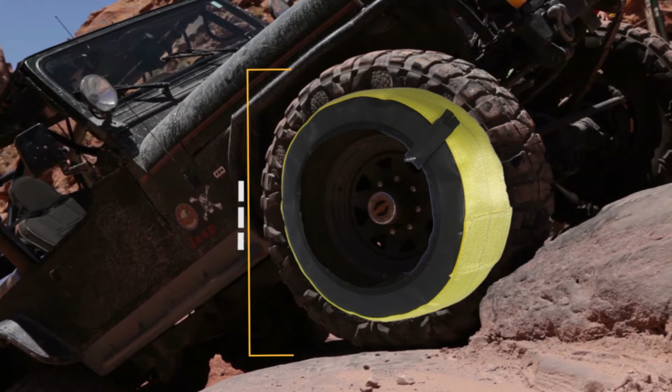Conceptually, Coyote Boltless Beadlocks are a tire within a tire. This tire within a tire locks and pinches both the inside and outside tire beads to any ordinary rim. In addition, and just as important, it also provides a 3-inch high, 50 PSI tire and rim protecting bump stop, even at a meager 3 PSI or less.

There are many other advantages too. First, the system allows you to use your existing rims, saving you money. You don't have to buy new rims. There are no DOT issues. They are street legal. They lock both the inside and outside tire beads securely to the rim, as already mentioned. They can be used with your next set of tires or rims.

And the tire and rim protecting bump stop needs mentioning again too. They are lighter than conventional beadlock rims. There are no balance issues. They can be easily balanced just like any standard wheel. Due to the beadlock occupying part of the tire air chamber, they take less time to air up and down.

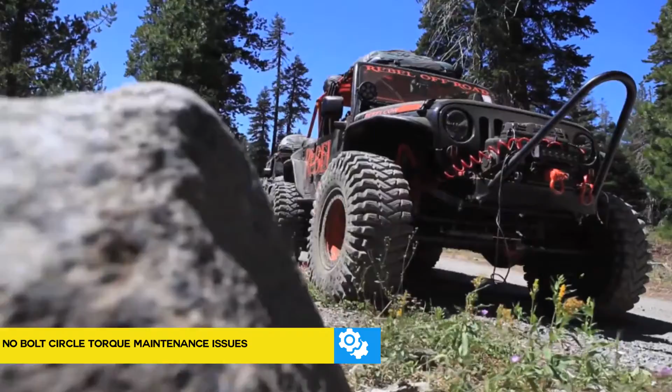They have no bolt circle torque maintenance issues. Just check the tube pressure once in a while. They provide a limp flat capability so you can move to a safer spot to change your spare when you have tire problems. The Coyote Boltless Beadlocks sport a 5-year warranty. They are proudly made and supported in the USA.

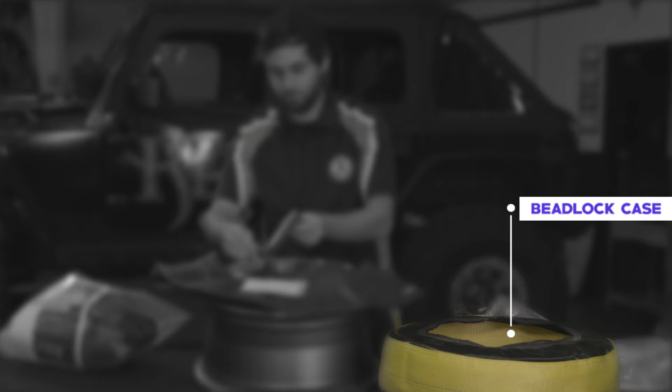Before we show you how to install a Coyote Boltless Beadlock, let's identify all the components we'll use in this installation process. These components include the beadlock case, inner tube, powder bag, and air channel, plus your existing tire and rim.

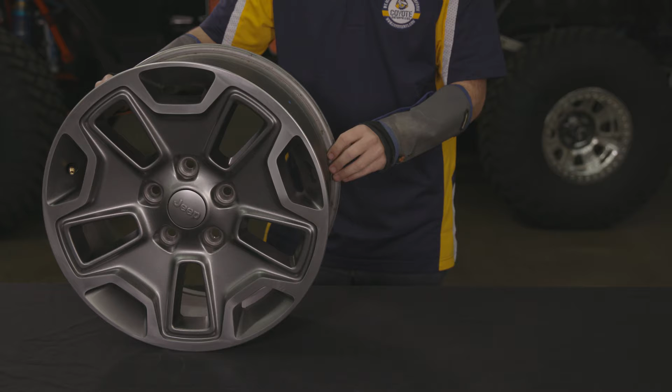Any ordinary tire will work with Coyote Boltless Beadlocks. You may use standard or new rims. Any stock or aftermarket rim will work with a Coyote Boltless Beadlock system. The Coyote Boltless Beadlock system works with an alloy rim, as we will do in this installation, or steel rims.

A Coyote Beadlock package contains all you need to make one installation per rim. The most important beadlock component is the beadlock case. It is the key to containing the inner tube and pinching the tire beads between the beadlock case beads and the rim's bead seating surface.

The beadlock case is the most improved and critical part of the Coyote Boltess Beadlock system. It is now made with stronger materials and improved construction methods, all resulting in a stronger, more durable product. It consists of 4 parts. Since it's a mini tire, we give the various parts tire names.

First, there are 2 black PVC sidewalls. These are made of PVC twice as strong as the original beadlocks imported from Australia. Second, there are 2 beads. They use new sewing techniques, ensuring a stronger product.

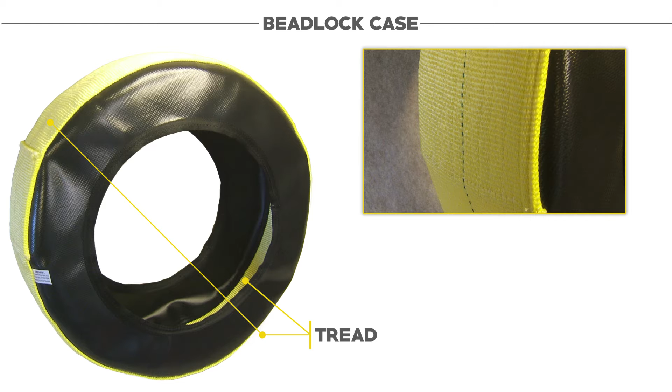Third, there is the tread. It is now made from material 9 times stronger than the ones imported from Australia. The tread overlap uses new, stronger joining methods too. In the edge view, you can see just how much thicker the new, stronger tread webbing is.

And fourth, there is the tread overlap. The importance of its added weight will come into play at installation. It will be used to counterbalance the weight of the 2 valve stems.

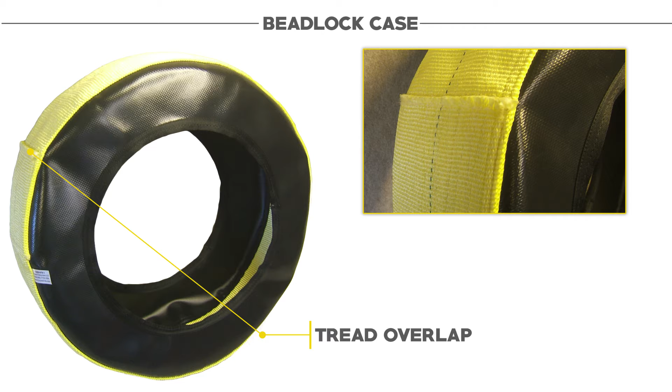More on that later. Each bag also contains an inner tube. The inner tube holds air within the beadlock case. This forces the beadlock case beads against the inside of the tire beads, pinching them securely against the rim's bead seating surface. Note that the inner tube has an all-thread valve stem.

Since you basically have a tubeless wheel, you must seal both valve stems and their related holes. For the tube, first check for the small O-ring at the base of the tube valve stem. It seals the valve stem on the inside of the rim. The larger O-ring goes on the outside of the rim and supplements the inner seal.

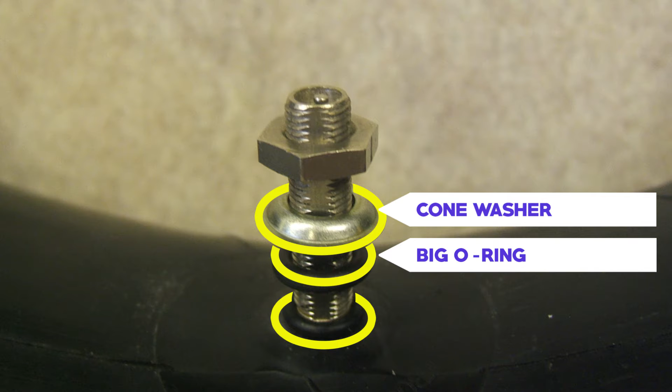The cone washer goes next, cone side up, on the outside of the rim. It grasps, covers, and protects the large O-ring. It allows the nut to be tightened without damaging the O-ring. The nut screws down onto the cone washer to tightly clamp and securely seal both the inside and outside O-rings.

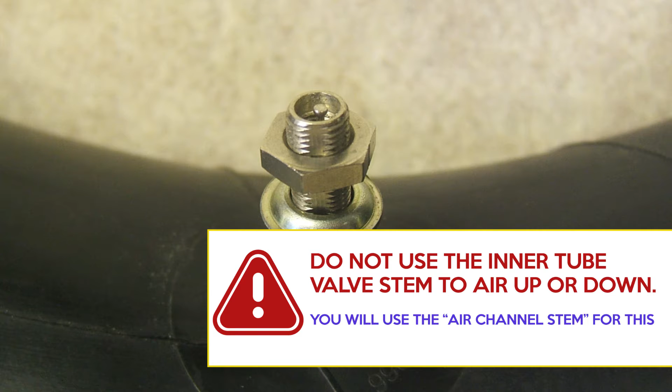The valve stem cap keeps the valve core clean, ensuring a clean air path for checking the pressure. This is how you'll tell the difference between the tire and the inner tube valve stems. Remember that. It's important because you never want to air down and up with that valve stem. You only want to use the air channel valve stem, not the inner tube valve stem.

To make sure all the beadlock parts move smoothly into place as you finalize the installation, you will find a bag of powder. This acts as a lubricant between all the parts. Also found in the beadlock bag is the air channel.

This patented air channel gets the air in and out of the tire's air chamber. Think of it like a snorkel between the outside world and the air chamber within. The metal valve stem is your outside world connection with the air channel.

The air moves through a channel created within the black PVC channel by a flexible, non-collapsible plastic spacer within. It prevents the inner tube from clamping shut all parts of the air channel. The air channel's open end sits within the tire's chamber, allowing the tire to freely breathe.

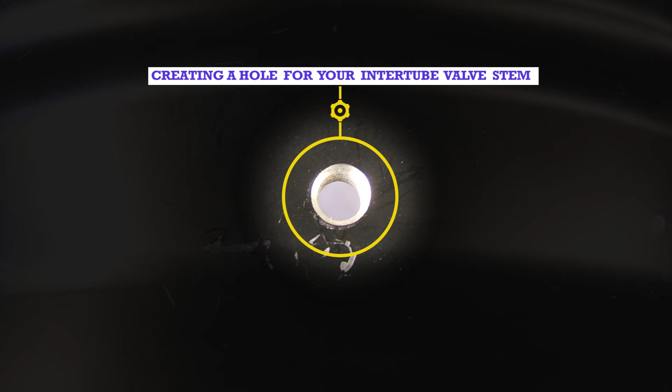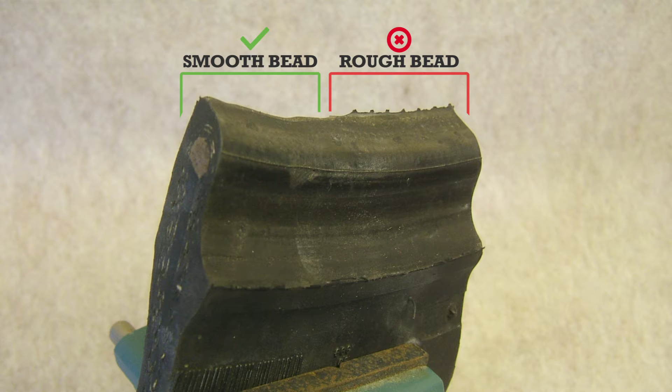Rim and tire modification tools: the center punch, small ball peen hammer, air grinder or electric drill, 1/8-inch pilot and 5/16-inch drill bits, along with the 45-degree chamfer tool, have to do with making the hole in your rim for the inner tube valve stem. The 2-inch number 40 grit sanding drum used on either the drill motor or air grinder smooths the tire bead sharp edges to prevent them from damaging the inner tubes.

The tire bead sharp edges need smoothing to prevent inner tube damage. The files are used to smooth a used rim's outer edge.

Beadlock specific install tools: we'll tell you why we prefer a Windex-like product over conventional tire lube later on. The 3x4x5-inch wooden blocks are used to create a workspace between the rim and the tire.

Arm guards or a long-sleeved shirt protect your arms when working through this workspace. The 11 and 12 millimeter wrenches are used to tighten the inner tube and air channel valve stem nuts. If you install Coyote beadlocks professionally, you will eventually want to make a specialized air channel lifting tool similar to what's shown.

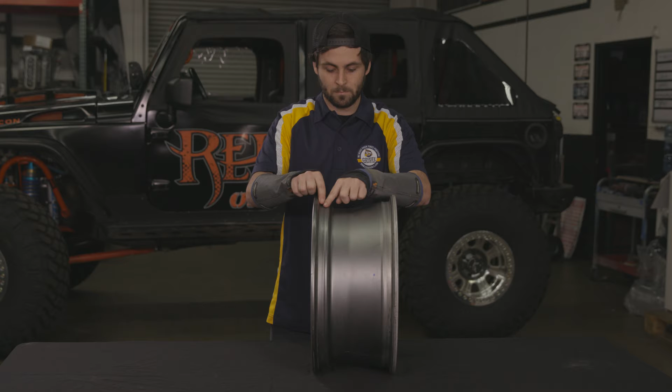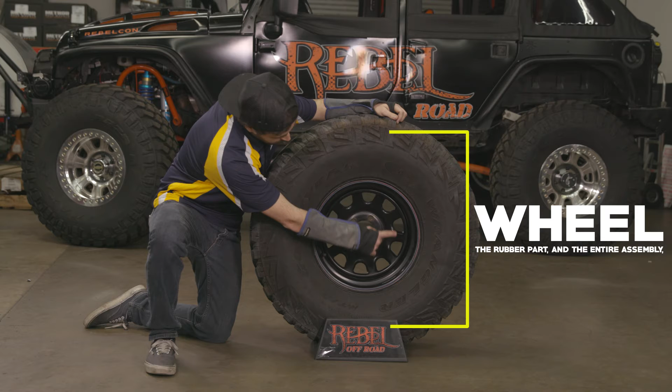To help you understand important terminology used in this video, let's review the anatomy of a basic rim and tire. Throughout this video, we will use the term rim to mean the metal part that receives the tire. The rubber part and the entire assembly we will call the wheel.

Let's look at a basic rim first. Here is the front of a rim—it is the lug nut side. Here is the back side that faces the vehicle and brake area. This is the drop center of the rim.

This smallest rim diameter area is what allows you to put a less than 15-inch ID tire bead onto a greater than 15-inch diameter rim.

Here are the rim's bead bumps. Here's both the inside and outside bead seating areas. Here's the rim's inside bead seating surface area. Here is the existing factory valve stem hole. The stock rubber valve stem is replaced by the patented air channel.

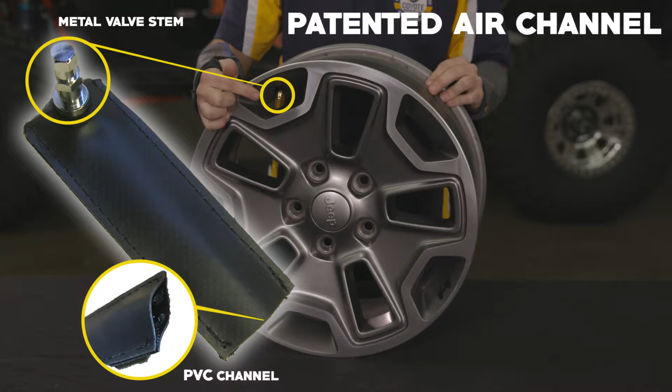Remove the stock valve stem. Most tire shops cut them out, as shown.

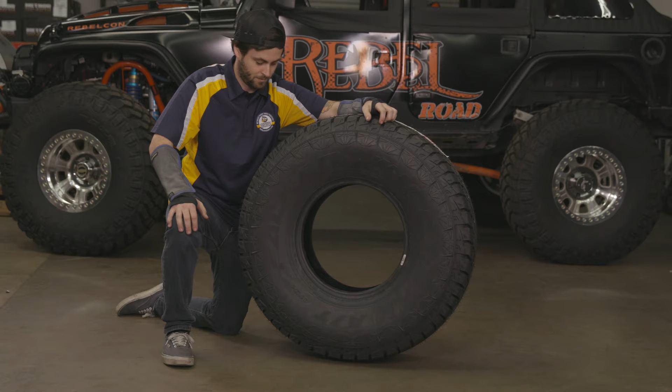Your tire has a few parts that also need identifying. This is the tire's tread, sidewalls, and beads.

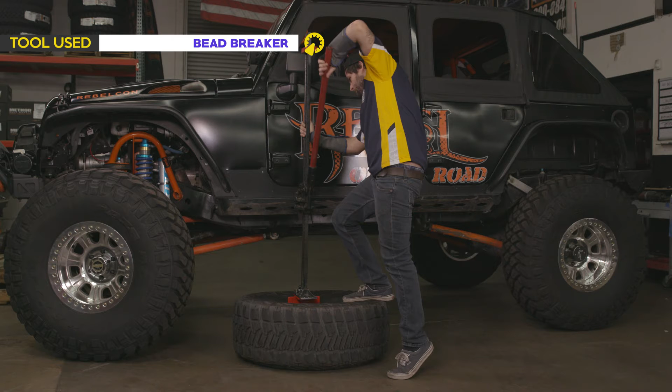Remove the valve core from the valve stem. Cut the valve stem from the rim—this will be replaced by the air channel. Break both tire beads from their seats on the rim, then remove the outside tire bead.

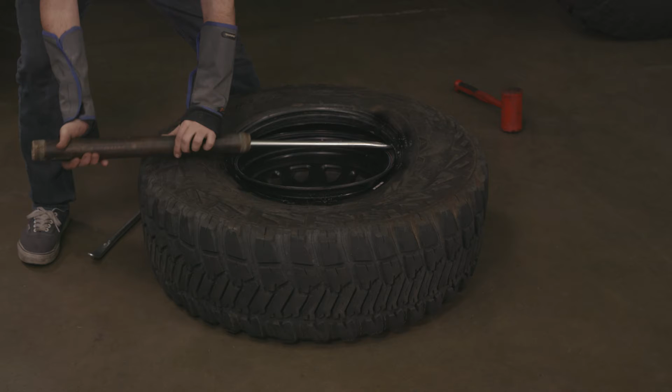Remove the inside tire bead.

If you are installing the Coyote beadlocks on used rims, you first need to properly prepare them. Preparation means cleaning the rim and removing 100% of all rough edges on its inner and outer edges. First, remove stickers and clean your used rims using soap and water or an industrial cleaner.

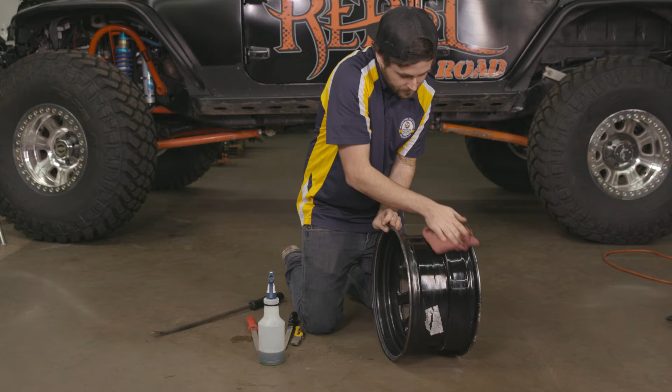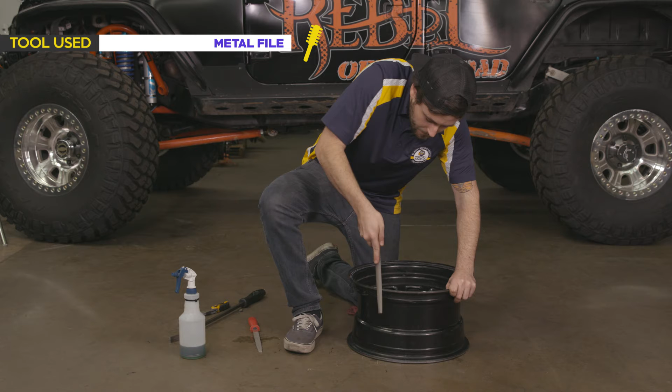Rough edges or burrs may cut into your inner tubes during installation. To remove any rough edges or rim burrs, smooth as necessary using a metal file. Finally, check your smoothing work for perfect smoothness.

With properly prepared new and used rims, determine the perfect inner tube valve stem hole location. This perfect location will most likely have to be adjusted to a more practical location later on.

First, lay the rim flat on a workbench with the outside of the rim facing up. The factory valve stem hole will also be facing up. Now, put the inner tube on top of the rim with the valve stem facing up. Position the inner tube's valve stem 6 to 8 inches clockwise from the rim's factory valve stem hole.

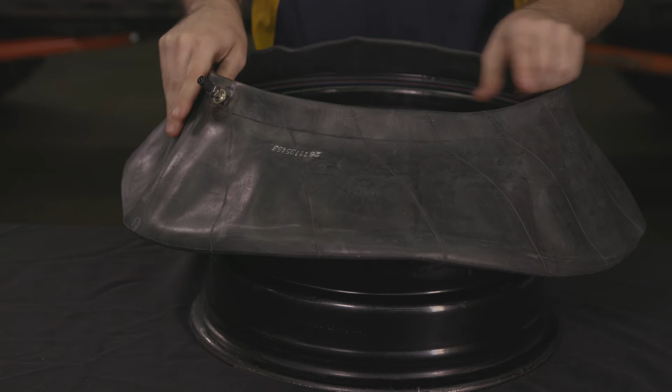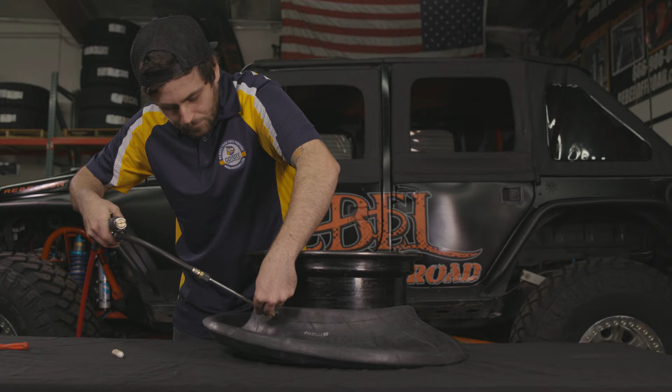Now, pull the tube completely over the rim. Inflate the inner tube enough for it to take shape. While inflating, the valve stem will distort against the rim as shown here. This will not harm the inner tube's valve stem.

Vertically center the inner tube on the rim as shown here. Mark the inner tube's valve stem location with an appropriate marker. This apparently perfect marked location needs to be carefully examined before drilling the hole for the inner tube's valve stem.

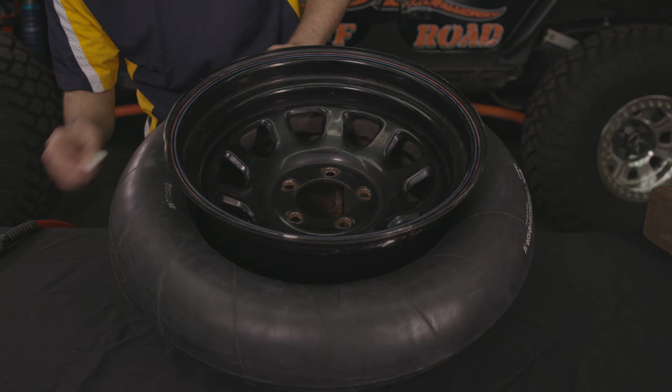Your marked location may not be practical, especially if you plan to have the inner tube's valve stem located inboard on the brake side of the rim. If the desired valve stem location is inboard, the location must be checked to ensure that it does not interfere with the brakes and associated components in and behind the rim.

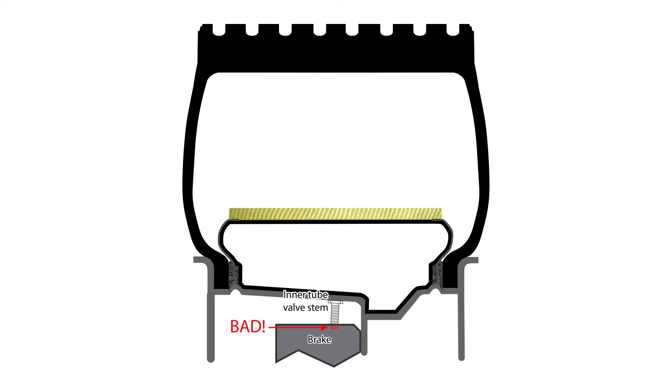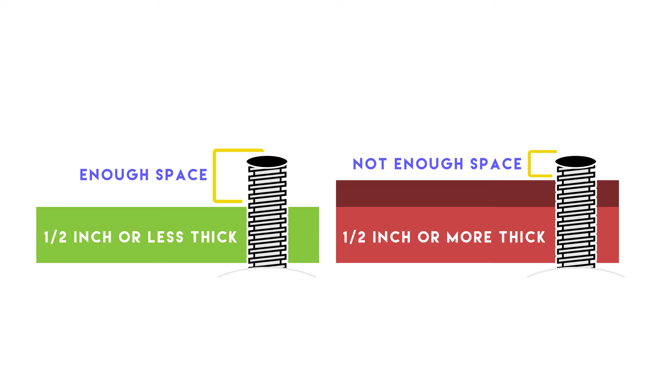Lastly, the rim must not be thicker than half an inch where you intend to drill the hole. If the rim is thicker, you will not be able to get a standard air chuck or most air gauges on the portion of valve stem that sticks out of the rim.

Adjust the perfect hole location to accommodate all of the above. This typically means moving the mark slightly toward the outside of the rim and clockwise or counterclockwise to end up between a pair of the rim spokes. A little more or a little less than 6 to 8 inches away from the factory hole is okay.

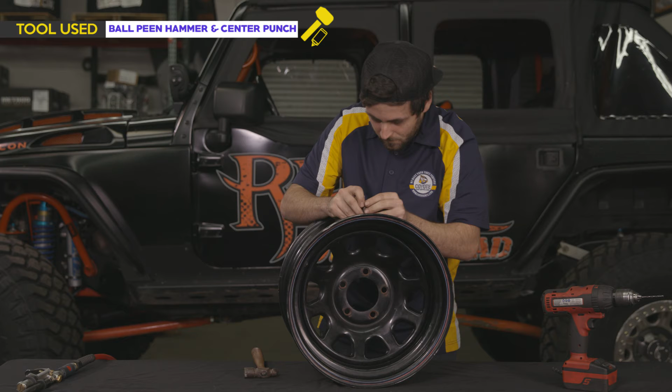If your relocated inner tube valve stem hole is now appropriate, center punch as shown. Now, drill a pilot hole using your 1/8 inch drill bit, taking care to drill this hole perpendicular to the rim's surface.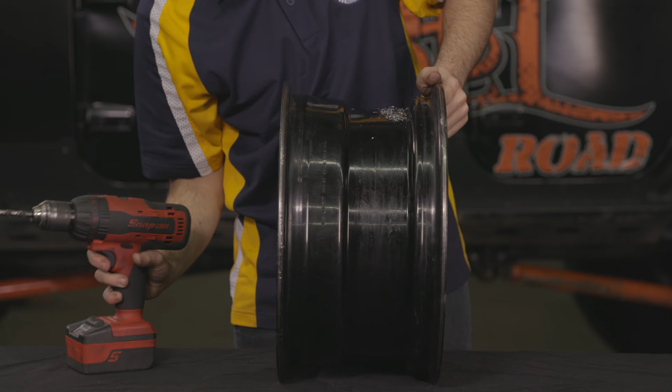Next, enlarge the hole to 5/16 inch, again paying attention to the perpendicularity. Carefully chamfer both sides of the hole as shown.

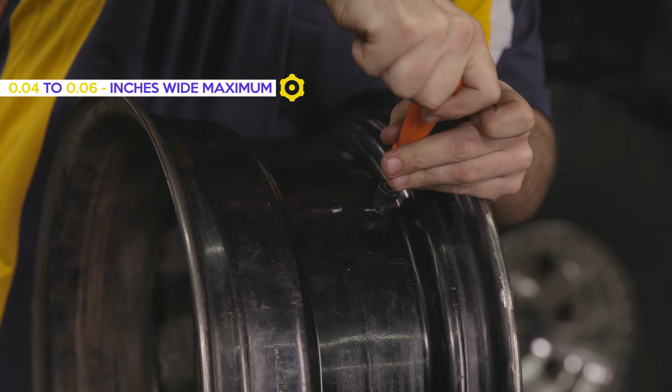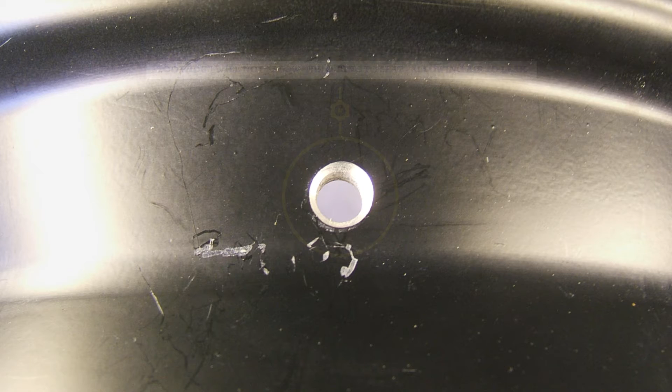The chamfer face should be 0.04 to 0.06 inches wide maximum. If using the chamfer tool with an electric drill, be cautious not to make the chamfer face too wide. Too wide means that the O-ring at the base of the inner tube valve stem will not seat, allowing air to leak. The Beadlock warranty does not cover improperly drilled or chamfered inner tube valve stem holes. Drill and chamfer very carefully.

After completing all drilling and chamfering, clean all metal chips off the rim and other components. Chips left behind may cause inner tube failure.

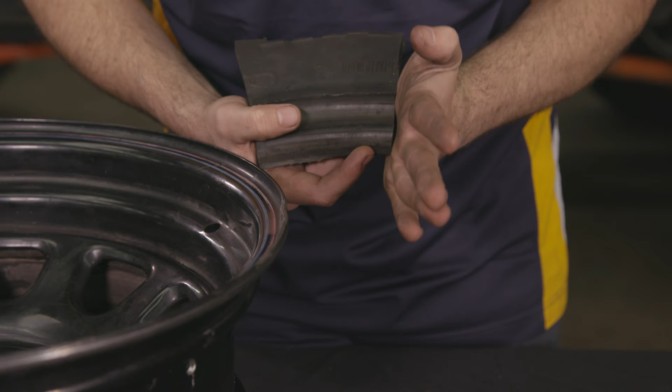The inside edges of your tire's beads are very sharp. In addition, the large tire beads are usually too wide to fit fully behind the rim's bead bumps. This means they hang out over the bead bumps, capable of cutting the inner tubes. Sharp tire beads cut Coyote inner tubes.

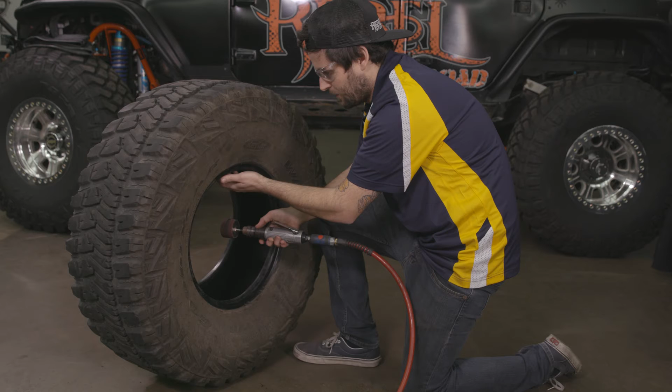To eliminate this problem, you must slightly round the sharp edges of your tire beads. Coyote Enterprises recommends using a number 40 grit 2-inch sanding drum on an electric drill or air grinder.

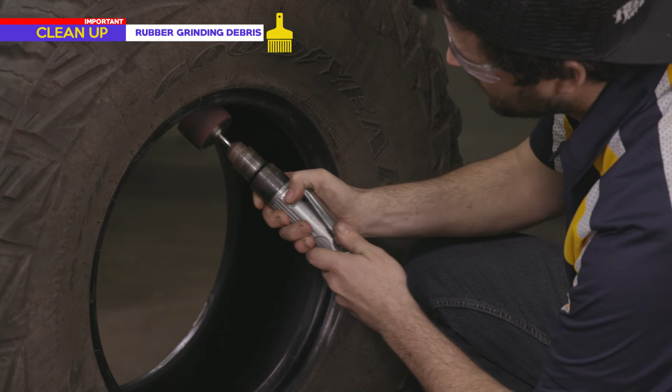Clean and remove all rubber grinding debris from within the tires and surrounding beadlock parts. With that done, coupled with the new Coyote heavy-duty inner tubes, failed tubes are a thing of the past.

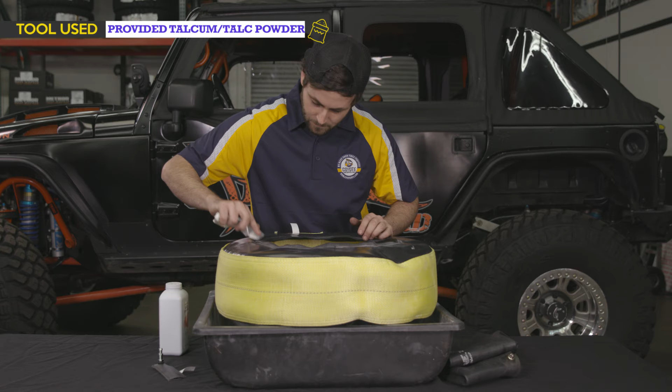Using the powder provided, powder all beadlock parts. This allows the inner tube and other beadlock parts to easily move and properly align during the installation process. Use lots of powder on each beadlock component.

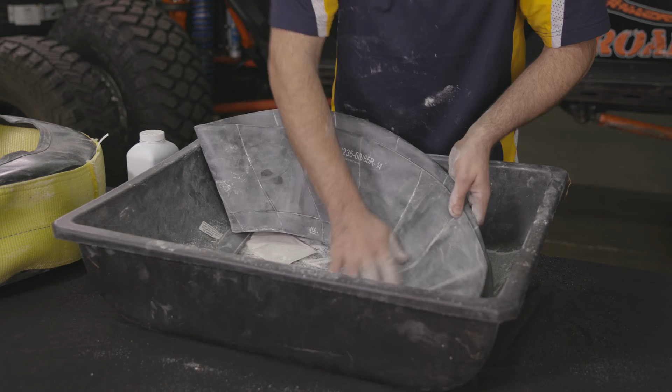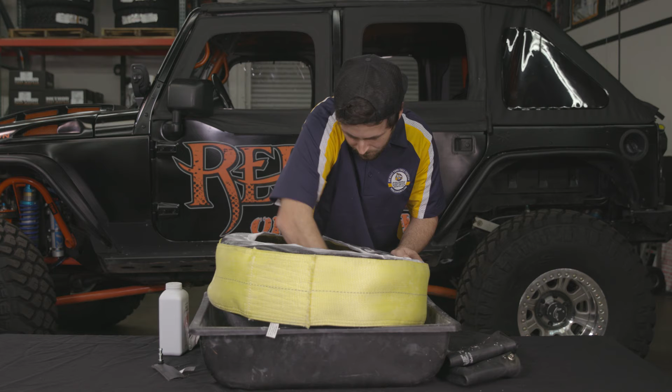If additional powder is ever needed, you may use any bath, baby, or talcum powder, hydrated magnesium silicate that does not contain cornstarch. We show using a small mortar boat to contain excess powder, but the inside of the tire works equally well. Proper powdering of all the beadlock components means shaking lots of powder on each component, then spreading it evenly across all surfaces with your hands.

Powder the inside of the beadlock case. Pay particular attention to powdering the inside and outside areas of the beadlock case beads. Next, powder the entire outside of the inner tube. This is best done with the tube lying completely flat, uninflated, and flipping it.

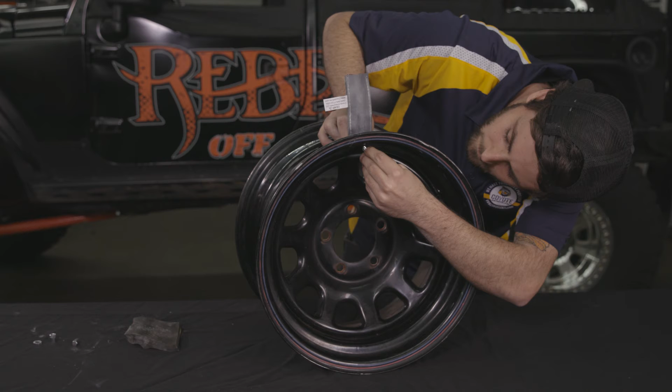The Coyote air channel has a metal valve stem at one end. Check that the rubber grommet of the air channel fits perfectly in your rim's factory valve stem hole. Temporarily and without force, hold an air channel up to and put it into the factory valve stem hole.

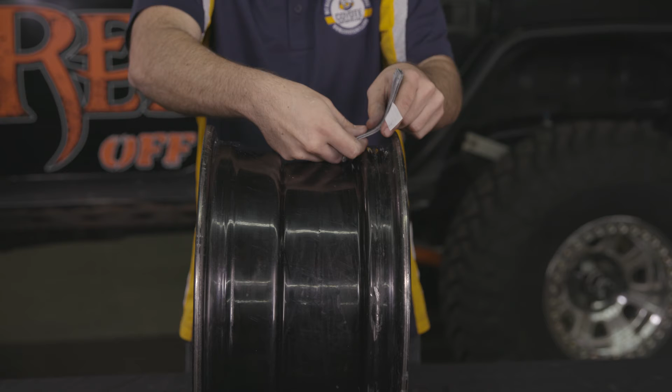Custom contour the air channel to the shape of the rim as shown. Check to see that the open air end of the air channel will reach past the anticipated location of the tire bead and beadlock case bead and up and into the tire's air chamber.

Using a Windex-like product to help mount the inside tire bead in place of conventional tire mounting lubricants. Use of this product ensures that if re-wetted in actual use, the rim will not spin within the tire. Conventional tire lubricants are soap-based. Mount the inside of the tire bead using the drop center of the rim as normal.

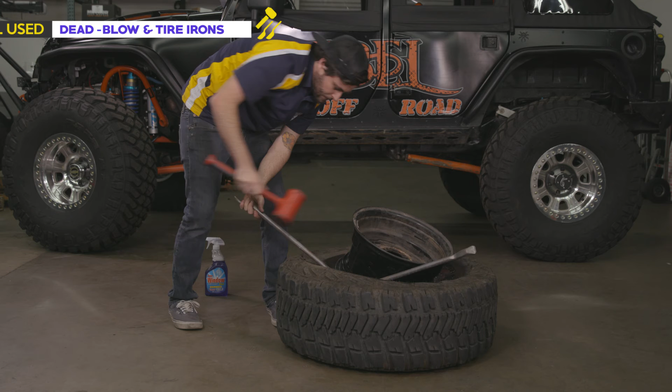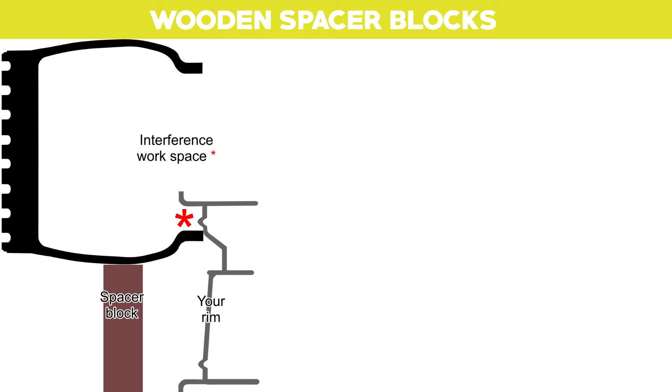Once the inside tire bead is on the rim, elevate the tire with the wooden blocks. We'll use this well-used veteran to show how to use the spacer blocks. In this position, you'll get the tallest tire lift. Moved to this position, you get medium height. And in this position, you get the least lift. Position the blocks to achieve the height needed for the best work gap and access to the valve stem holes.

By elevating the tire from underneath, a workspace is provided so you can work between the outside edge of the rim and the unmounted outside of the tire bead.

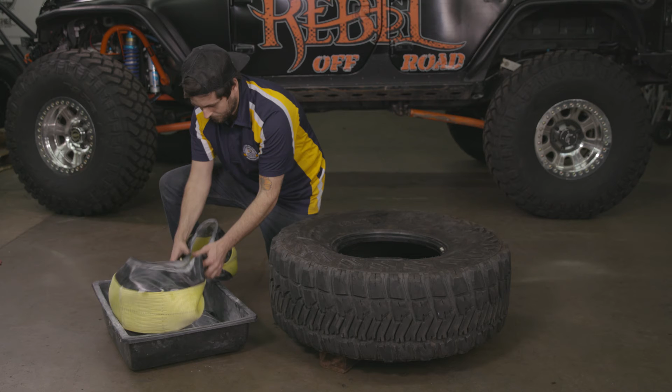Now, working through this workspace, mount the inside beadlock case bead, taking advantage of the rim's drop center, just as with the tire bead. But first, rotate the case until the tread overlap is opposite the two valve stem holes. Having the heavier tread overlap area directly opposite the valve stems will help compensate for the weight of the two valve stems.

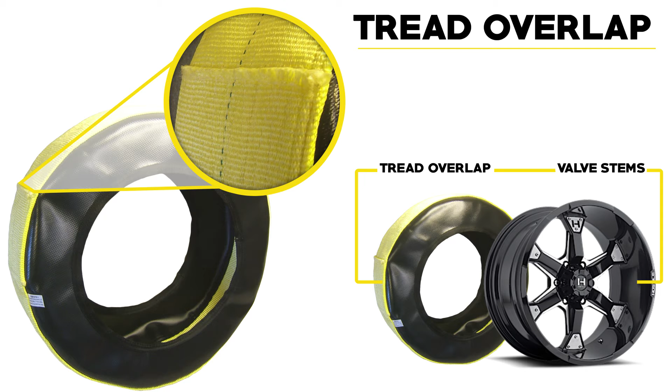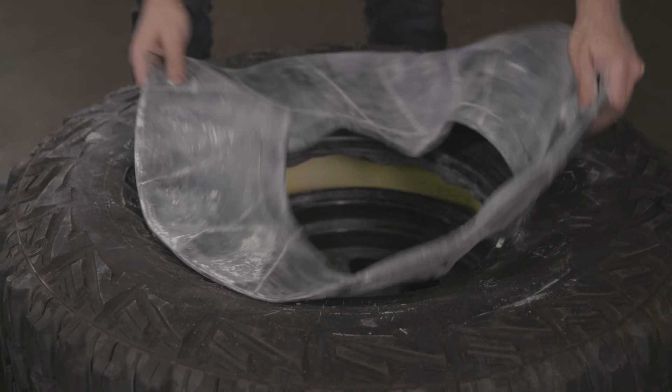Before stuffing the inner tube into the beadlock case, check to make sure that the smaller inner O-ring is at the base of the tube valve stem. Next, lay the inner tube flat on the tire as shown, making sure that the inner tube's valve stem is pointing up.

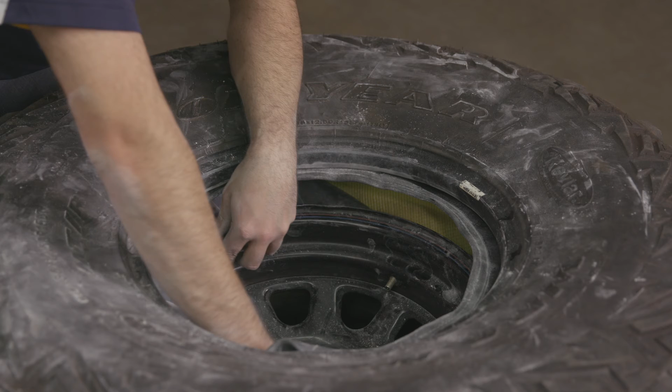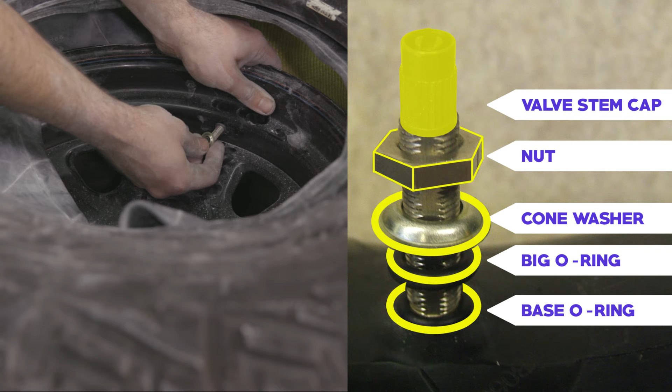Before stuffing the inner tube completely into the beadlock case, push the inner tube's valve stem through your newly drilled hole in the rim. This may require changing the height of the blocks for free access to the rim's new valve stem hole. Once through the rim, install the larger O-ring on the inner tube valve stem and the cone washer cone up. Lastly, thread the nut halfway down the valve stem.

Now, stuff the remainder of the inner tube inside the beadlock case. This may require slightly stretching the tube over the rim. Once mounted on the rim, check and feel by hand that the inner tube is laying flat and smooth. Make sure that the inner tube has no folds, wrinkles, or twists. The inner tube's valve stem should also be relaxed and unstrained.

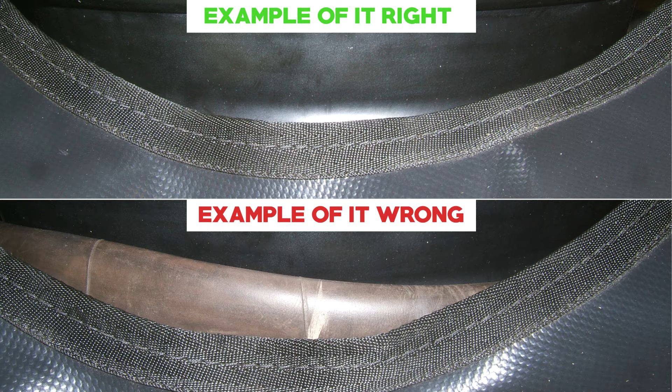As shown, mount the outside beadlock case bead over the rim. To achieve this, it will again be necessary to position the beadlock case bead in the drop center just as you did with the first tire bead. But in this case, you must now make sure that the bead is on the rim's drop center and not on the tube. If you are on the tube, you may pinch and cut it when forcing this bead over the outside edge of the rim. With the bead on the drop center, there is no chance of damaging the tube.

You and your beadlock inner tube will be happy campers if you place the beadlock outer bead in the drop center and not on the tube either time. Do the same when placing the tire's outer bead over the rim. Remember that when we get to forcing the tire's outside bead over the outside rim.

To install the Coyote air channel, either remove or reposition the spacing blocks as necessary for access to the factory valve stem hole. The tire must rest on the rim at a new height, whichever allows the easiest access to the rim's factory valve stem hole. Tilt the tire over the factory hole to where you can freely access it without stressing the inner tube valve stem. As shown, insert the pre-contoured air channel's valve stem into the factory rim hole.

Ensure that the air channel's grommet seats properly into the rim's hole. This means that you can see a thin portion of the grommet fitting unwrinkled and completely into and through the factory rim hole. Wrinkles and bunches lead to tire air leaks. The open air end of the air channel should lie flat. Plus, it must point up and into the main air chamber of the tire as shown.

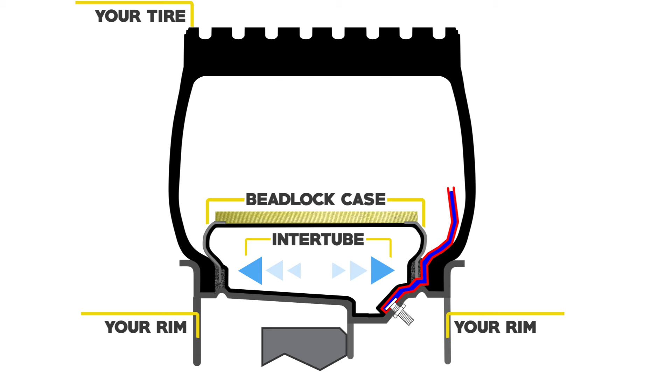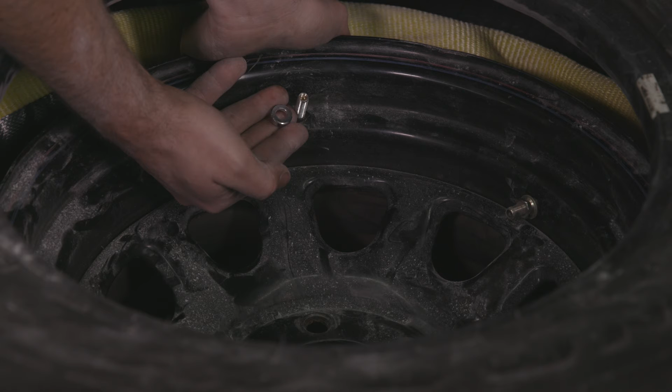Assuring again that the thin part of the valve stem grommet is properly seated into the factory valve stem hole, apply the washer, larger hole side down, toward rim and nut onto the air channel's valve stem as shown. Gently tighten the nut.

As the beadlock inflates, an improperly placed beadlock bead—that is, when the bead is not placed below and on the rim—will try to lift up and onto the air channel. This usually results in damaging the air channel. To avoid this, follow the next step.

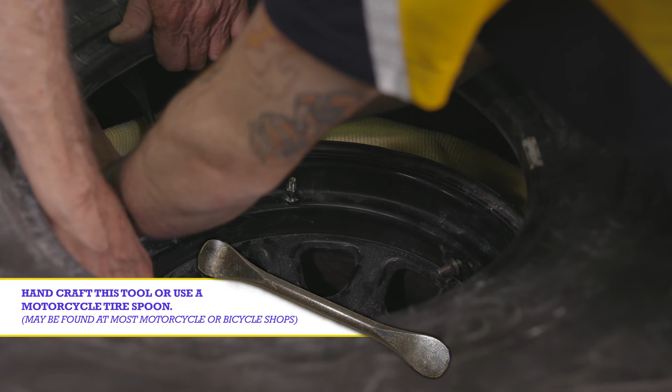With the fully mounted beadlock, force your fingers down and under the outside beadlock bead. Once under that bead, lift it up and onto the metal valve stem end of the air channel. This may be a little bit tight. Consider making a specialized tool to ease grabbing and lifting the bead up and over the air channel. If you professionally install Coyote beadlocks, for sure you will want to fabricate a tool similar to this one.

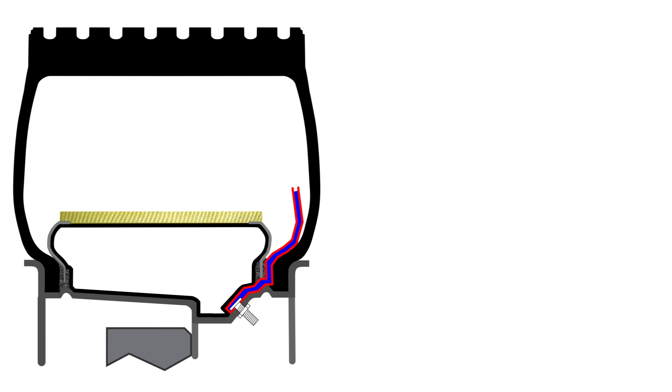The end of the air channel closest to the metal valve stem will now be between the beadlock case bead and the tire bead. The open air end of the air channel will be snorkeled up and into the tire's air chamber.

Begin to mount the outside tire bead as shown. Place the outside tire bead in the drop center of the rim opposite both valve stems. Make sure that the bead is not on or pinching the inner tube, as we showed when installing the beadlock's outer bead. This is not covered by the warranty.

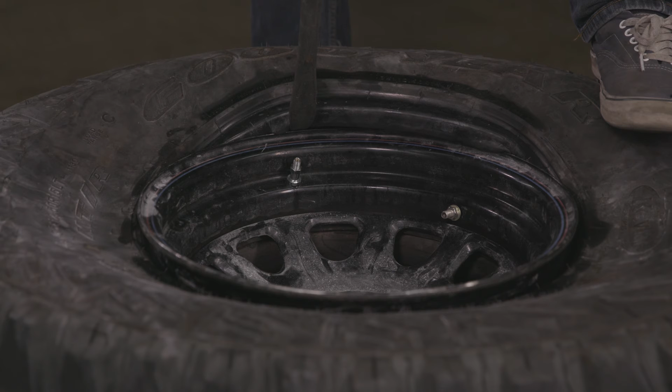Mount the tire bead by beginning at the inner tube valve stem. Using the tire irons and avoiding pinching the tube, continue the long way around clockwise to the air channel valve stem. Stop when the outside tire bead is about to drop over the rim just above the two valve stems.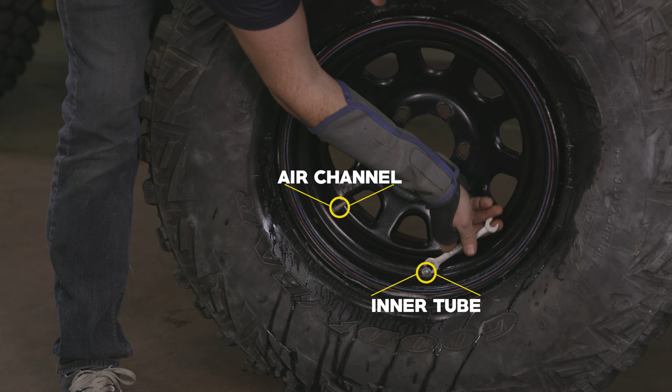Support the tire to avoid stressing the air channel and inner tube valve stems as shown. Once supported, continue mounting the outside tire bead so that the bead finally drops onto the rim above both valve stems as shown. Now tighten the inner tube's valve stem nut firmly. Tighten both inner tube and air channel's valve stem nuts as shown, but do not over tighten.

Before popping the tire beads onto the rim, first lubricate both the inside and outside beads with a Windex-like product as shown.

Now inflate the inner tube to about 10 psi, or enough to gently push the tire beads out against and into air-holding contact with the rim. The inner tube will now have pushed the tire beads into full air-holding contact with the rim as shown. But stop inflating the tube now.

Do not try to pop the tire beads onto the rim with the Beadlock inner tube.

Ensuring adequate tire bead lubrication and using the air channel valve stem, pop or set both tire beads onto the rim. Relubricate as necessary. Do not exceed the maximum load rated pressure of the tire or the rim, whichever is lesser. After the tire beads are set on the rim, remove the valve core from the air channel and completely deflate the tire only.

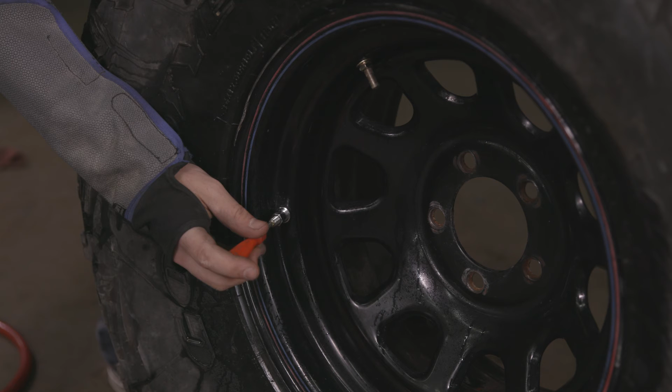Next, fully inflate the Beadlock inner tube to 40 psi, which is what we recommend, or what you plan to run in the Beadlock. At 40 psi, there is room for thermal pressure increase. The maximum rated Beadlock pressure is 50 psi.

Tighten the air channel valve stem nut as shown. Do not twist the air channel valve stem as you tighten the nut. Again, you can watch the valve stem core to see if the valve stem is twisting, as you did with the inner tube.

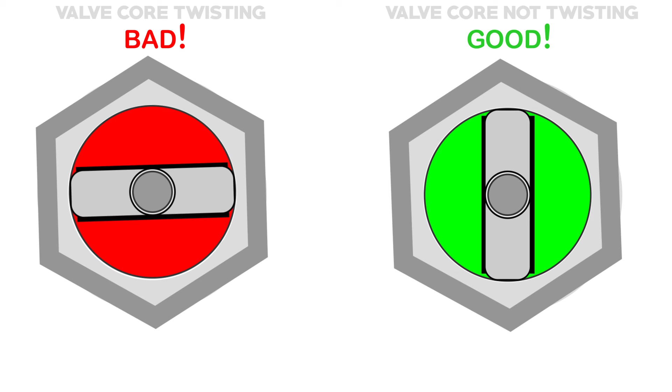If either the inner tube or air channel valve stems appear to be twisting, you can hold them in place during tightening by using the extra inner tube valve stem nuts in a jam nut technique as shown. Inflate the tire to your desired pressure.

In all cases, the tire pressure cannot be greater than the Beadlock pressure. Assuming that you inflate the Beadlock inner tube to the maximum of 50 psi, then the maximum tire pressure would be 45 psi. Put another way, the tire pressure must always be at least 5 psi less than the Beadlock pressure.

If the tire pressure is greater than the Beadlock pressure, you will not be able to balance the wheel. That's because the higher tire pressure makes the Beadlock floppy, and the tire balancing machine cannot handle that dynamic weight movement.

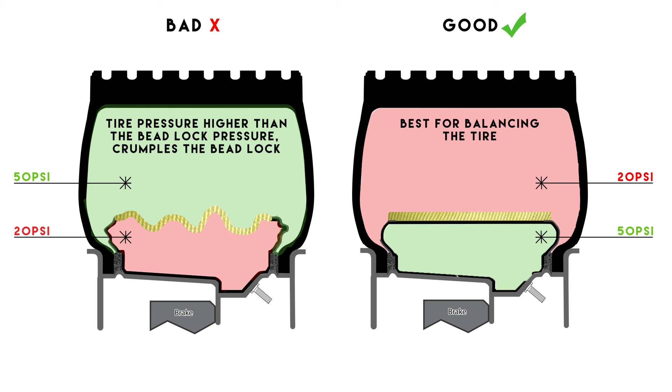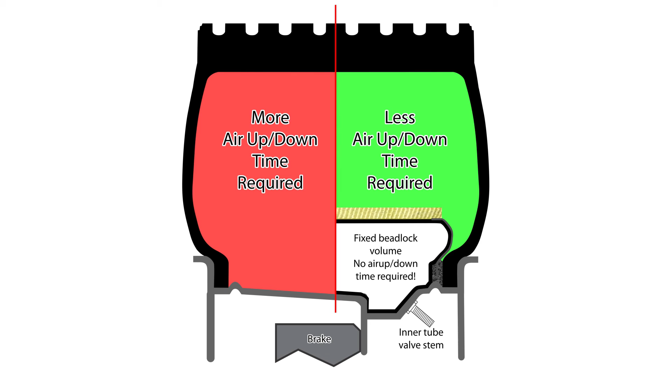And just for your information, when it comes to airing down and back up, you're at a real advantage over those without Coyote boltless beadlocks. When you air down, you're actually airing down less volume since the beadlock occupies some of the tire's original airspace. So that takes less time.

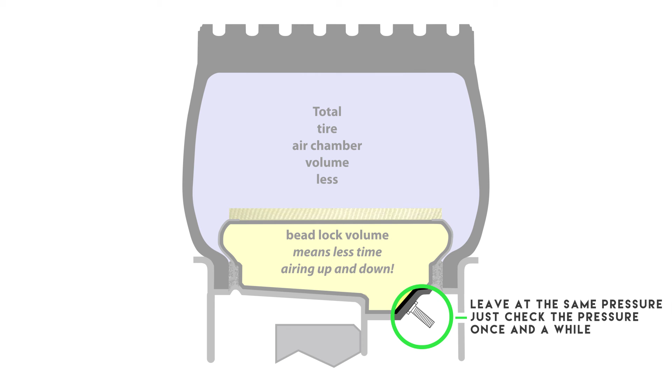Same goes for airing back up. Less volume, less time. And regarding the all-thread beadlock valve stem, you always leave it at the same pressure. Just give it an occasional quick pressure check.

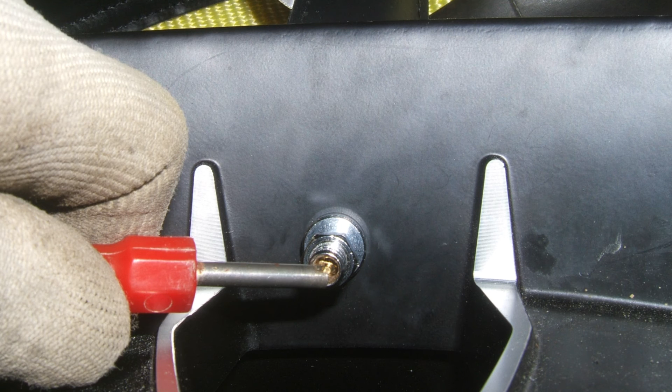Depress the air channel valve core for 5 seconds. Air should easily flow out of the tire. With the sound of airflow, you are assured that the patented air channel is working properly. If air does not continually flow out of the tire, the air channel must be checked for proper installation, and if necessary, reinstalled or replaced if damaged.

With the Coyote Beadlock system and tire properly inflated, plus all valve cores and stem nuts tight, use a mild soap and water solution to check all tire beads and valve stems and cores for leaks.

Like never before, you are ready to tackle traction-challenging terrain with your new Coyote Enterprises Boltless Beadlocks ready for action. Just air down with your Coyote automatic deflators and go.

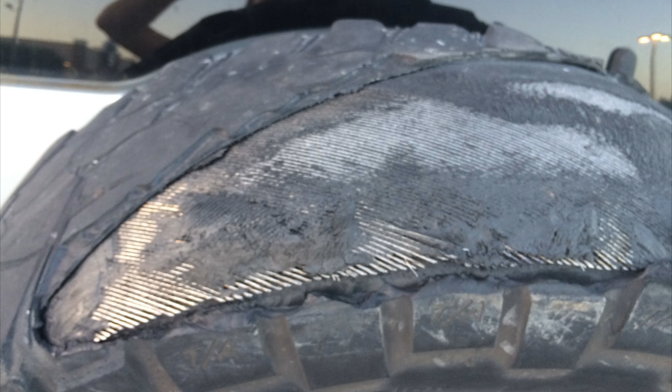First and foremost, always have a way to air your tires back up to street pressure before you even consider airing down. With low tire pressure, your vehicle does not handle as expected or may damage your tires. This may cause an accident leading to injury or death. Only drive on the highway with your tires fully inflated to your vehicle or your tire manufacturer's recommended street pressure. Driving on the highway with underinflated tires is dangerous and potentially lethal.

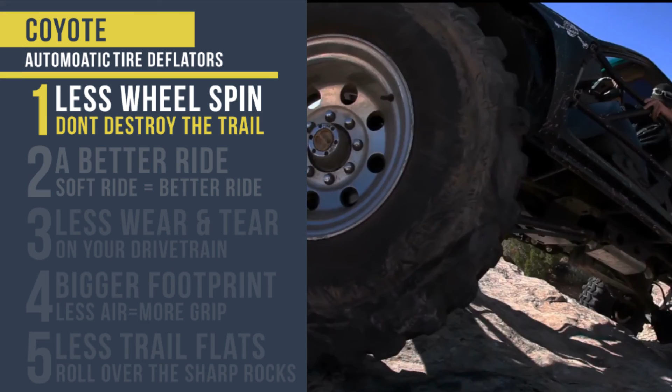There are 5 reasons to air down. 1. Softer tires lead to less wheel spinning, trail abusing travel. Be nice to Mother Nature and air down.

2. Softer tires make for a more comfortable ride. Be nice to yourself and your passengers. Air down. 3. Softer tires are easier on your drivetrain.

You don't bounce and spin your tire as much. This leads to less thrash and bash damage on your tires, suspension, transmission, transfer case, and U-joints. Your tires generally mold over the obstacles versus struggling to get up them. Be nice to your drivetrain and air down.

4. Softer tires make a bigger, softer footprint. This means that you can now float over that soft sand, mud, or snow rather than sink in and get stuck. It also gives you instant years of experience by letting the tires generally conform to the big rock or deep hole. This means that you easily crawl up and over instead of beating your way over the obstacle.

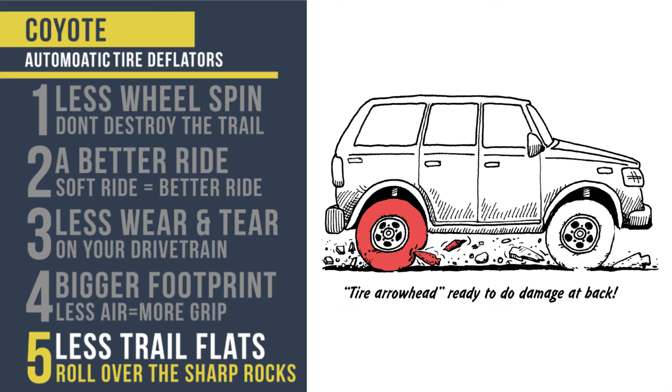That's because the fronts encounter a relatively flat-laying, non-tire damaging roadbed. But look out, backs. They see a churned up mess with the tire arrowheads eagerly waiting a chance to puncture your tires. Be nice to your tires and air down.

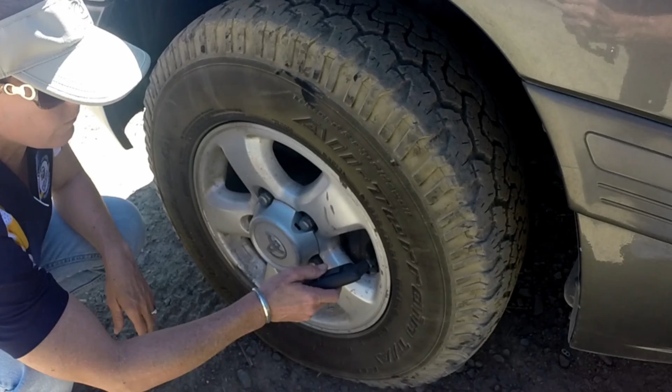Okay, so here's the traditional way to air down. As soon as you get to the trailhead, you're going to exit the vehicle and go around to each wheel, checking the pressure and manually, by hand, deflating the tire, checking and rechecking the air pressure to make sure that each wheel is specifically set to the pressure that you need for the trail.

There's an easier way to do this though. The Coyote automatic tire deflators offer a no-brainer way to do it perfectly, every time with little energy. Use them and have coffee while your friends struggle with the traditional way.

Once preset to your destination pressure, the Coyote automatic tire deflators will reliably deflate your tires to your destination pressure. Usually, by the time you've installed the 4th deflator, the 1st is ready for removal.

So, why does she need this? Well, don't throw it away just yet. Keep it around for emergencies, like checking for leaky tires. But it's now a thing of the past come air down time. With little effort, you're ready to hit the trail in no time.

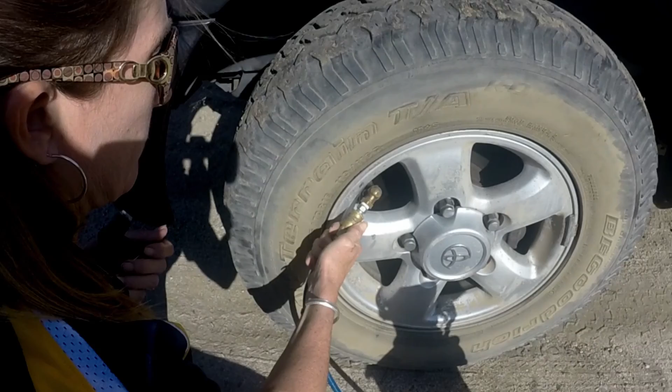As mentioned at the beginning, you must air up to the highway pressure before you leave the trail and hit the highway. Coyote automatic tire deflators are designed to ease your life, warranted for life under normal use. Try them. You'll love them.